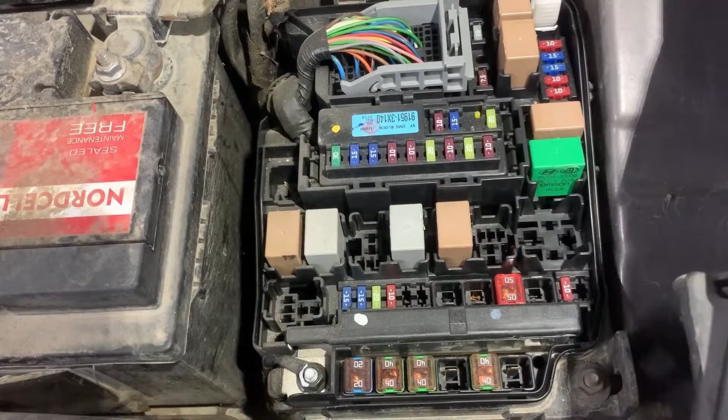Before I show you the location of the fuses, first I'm going to show you how to test the fuses, using a test light and a multimeter. First I'll show you with a test light. In order to test the fuses with a test light, we need to turn the ignition on.

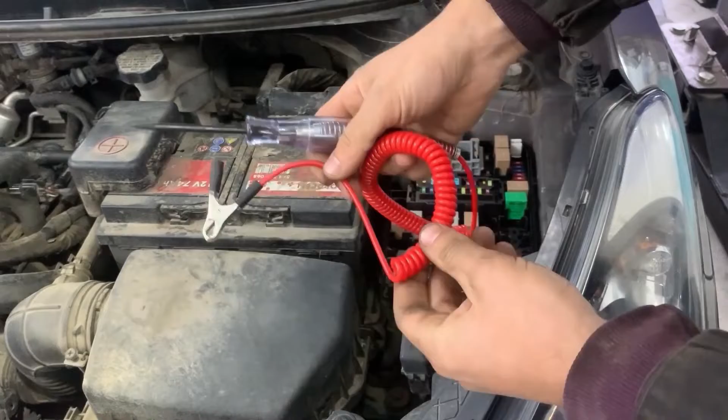This is the test light that I'm going to be using. You need to put the other end of the cable onto battery negative or chassis ground. In my case I'm going to put it on battery negative.

So these are the fuses that I'm going to be testing. On each side of the fuse there is a pin that we need to touch with the test light, and they should both light up. If one of them lights up and the other one doesn't, that means the fuse is blown. If they both light up, that means the fuse is good.

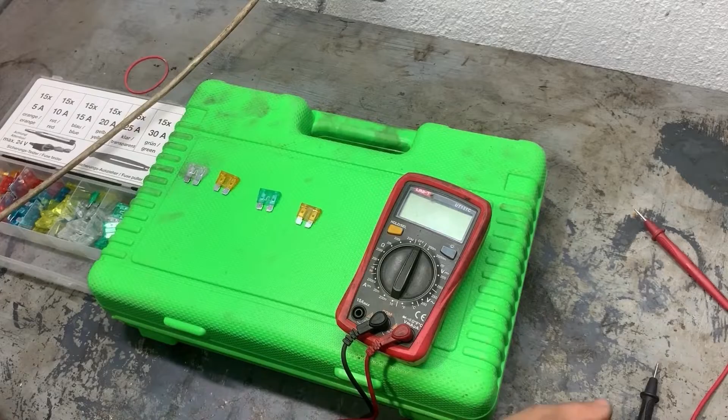Next we're going to test fuses with a multimeter, if they are good or bad. This is what the fuse looks like, and this is the contact in the middle that connects to the two pins. If the contact is connected, that means the fuse is good. If it's burnt, that means there is an open circuit on the fuse and the fuse is blown.

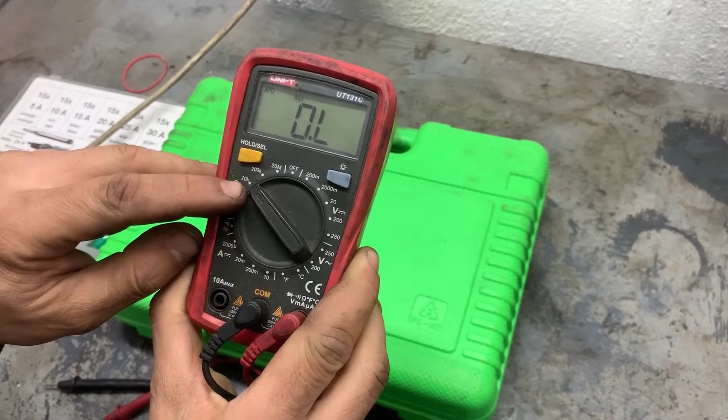So in order to check the fuses, we need to measure their resistance. Turn the multimeter on to 20k ohms and we'll start measuring. When measuring the resistance of the fuses, the resistance has to be very close to zero.

First we'll check the resistance of the two cables, which has to be zero as well. And now we'll start testing the fuses. If it shows something close to zero, the fuse is good. If it doesn't show anything, that means the fuse is blown. If it shows a lot of resistance, the fuse is also not good.

The first one showed 0, the second one also shows 0 ohms, the third one shows 0 ohms, and the fourth one shows an open circuit. It doesn't show any ohms, nothing is changing. That means this fuse is blown.

Now we see what the condition of the fuse is visually. We can see that the contact in the middle is not connected to the two pins, so that's why it doesn't show any resistance, because it's an open circuit.

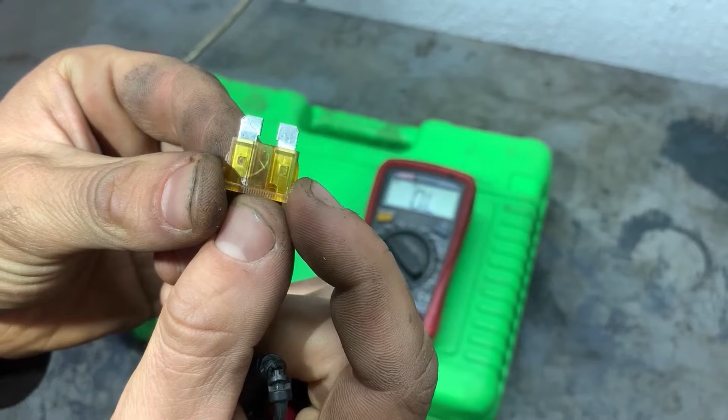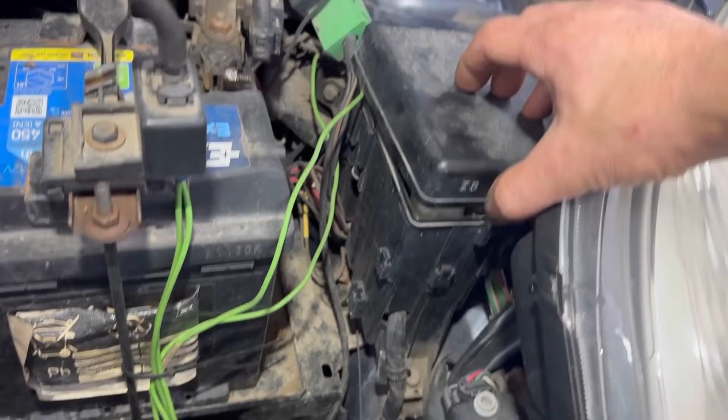Next I'll show you the location of all the main fuse boxes for this Toyota Yaris. There are two main fuse boxes on this car. One of them is in the engine bay area, right underneath this plastic cover. We need to remove that cover and we'll see the fuse box in the engine bay.

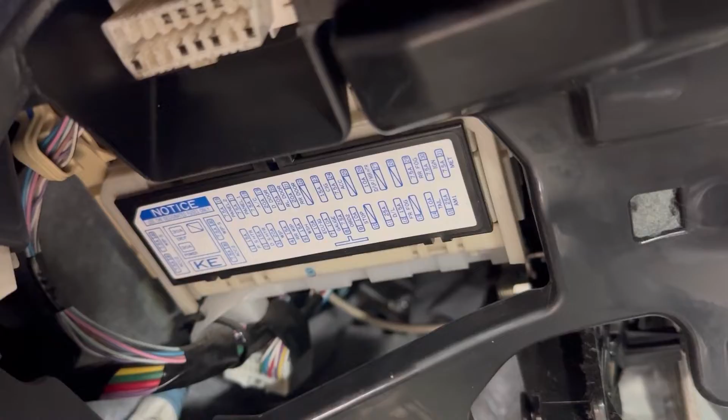Next I'll show you the other main fuse box. It's in the fascia underneath the dashboard, underneath the steering wheel. We'll go just underneath the dashboard and we'll see it, right there underneath this white cover. We need to remove that cover and we'll see the fuse box, and that's the fuse box right there.

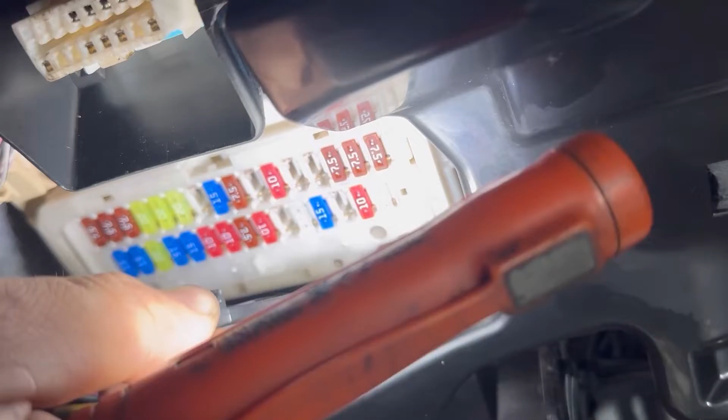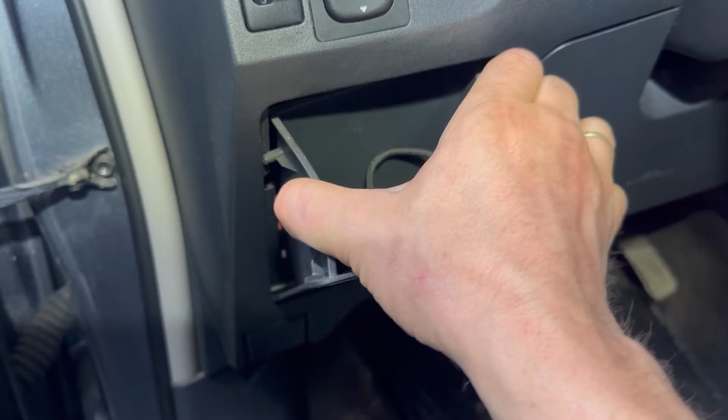There's another part to this fuse box. The other part is behind this pocket. We need to remove this pocket just by pulling it out, and we'll see the other part of the fuse box. And the fuse box is right there.

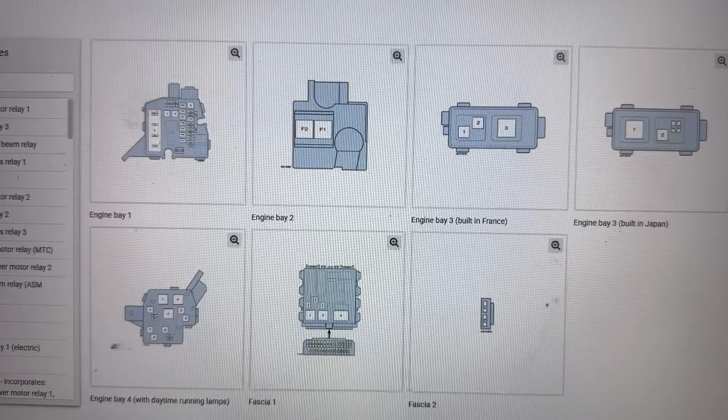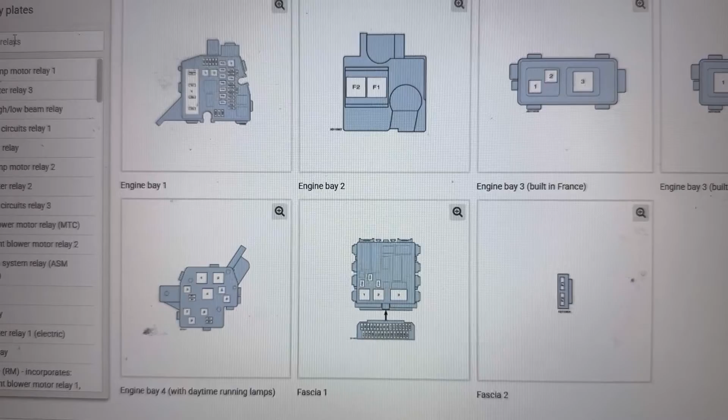Next I'll show you in the service manual all the fuse boxes for this Toyota Yaris. We can see there are the two main fuse boxes, and there are some smaller fuse boxes around the car. On the left are all the fuses in those fuse boxes.

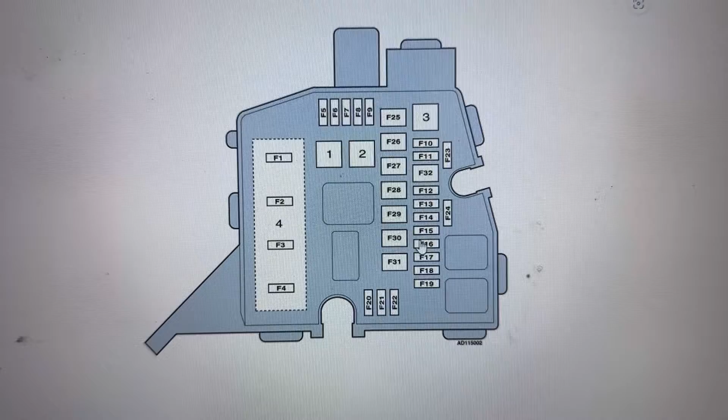In the search tab, we're going to type ASM transmission, and it will show us all the fuses for it. We can see there is one relay and 4 fuses, located in the engine bay and fascia fuse boxes. First, we'll show you the location of the fuses in the engine bay fuse box: F15 7.5 amp fuse, F32 40 amp fuse.

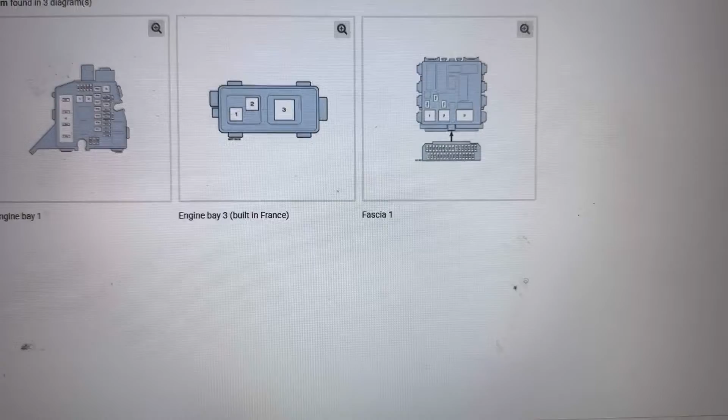Next, I'll show you the location of the relay in the engine bay 3 fuse box for cars built in France. It's relay number 3.

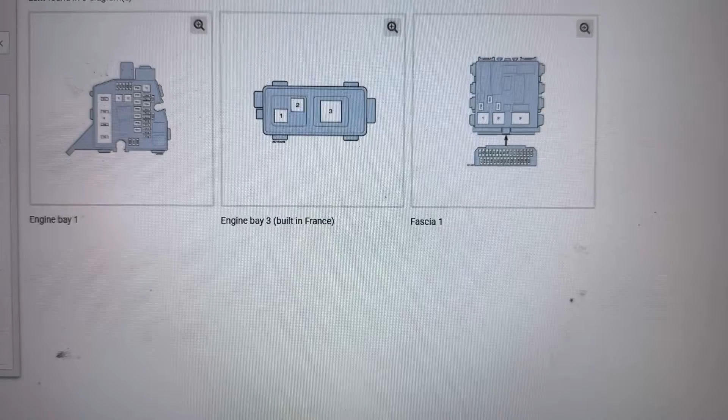Next, I'll show you the location of the fuses in the fascia 1 fuse box. The fuses there are F15 7.5 amp fuse, and F23 10 amp fuse. Hopefully the video was helpful.